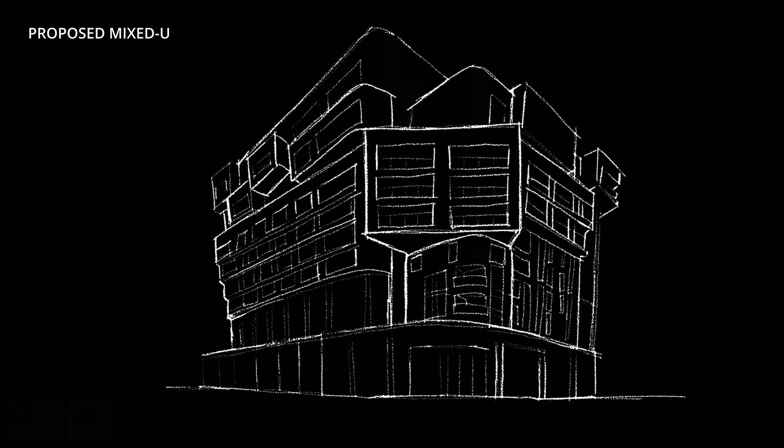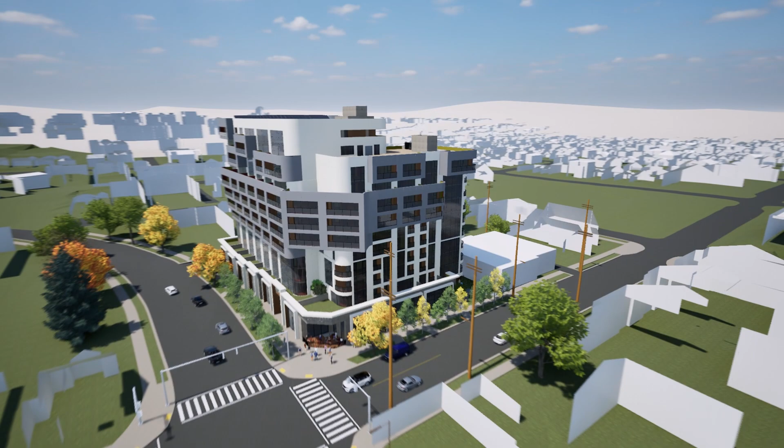Our project started on acknowledgement of the growing housing supply challenges within Calgary. Supported by the H.A.T members, it's focused on developing a residential building in inner city Calgary. We decided to build a 12-story multi-use residential building, and we set our target demographic to meet the needs of young families and economically independent retired couples.

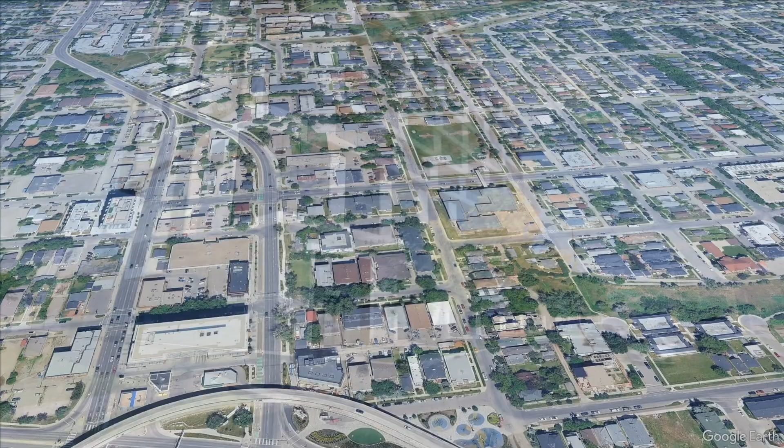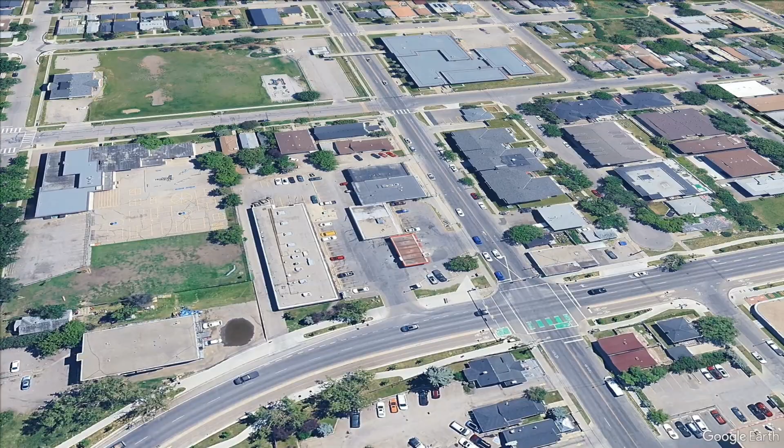The building's location at the intersection of First Avenue Northeast and Edmonton Trail within the vibrant Bridgeland-Riverside community is essential to our vision. Bridgeland is one of the fastest growing communities among inner city.

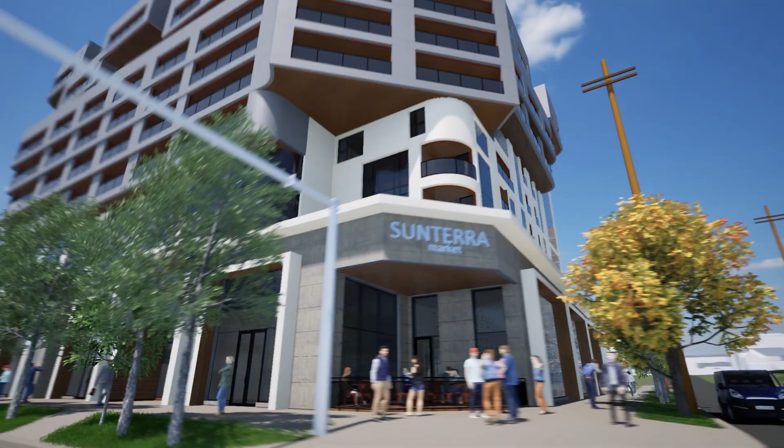I'd like to introduce our project building, where the interior and exterior spaces interact with the street and people, and where the building and people come together through the public space for the local community.

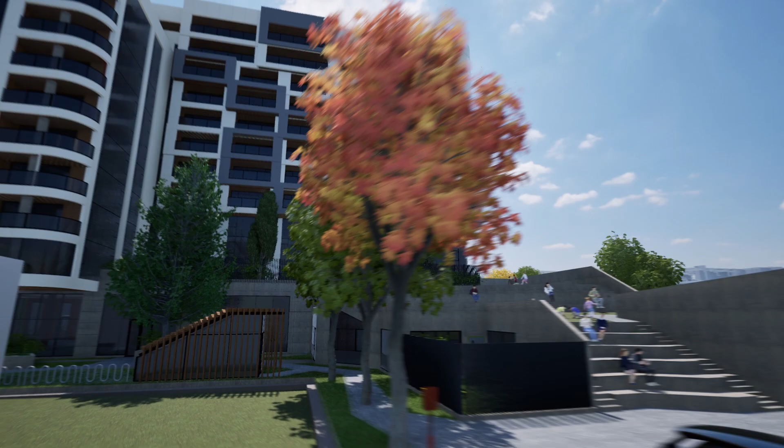Initially, our design concept derived from a comprehensive understanding of contextual site analysis, and we've developed a building facade and landscape design based on this conceptual foundation. We'll now elaborate on these more detailed situations, including the key detailed drawings.

We figured the initial step was to get grips with the site and its surroundings, so we could come up with a building design that would properly address our group's needs.

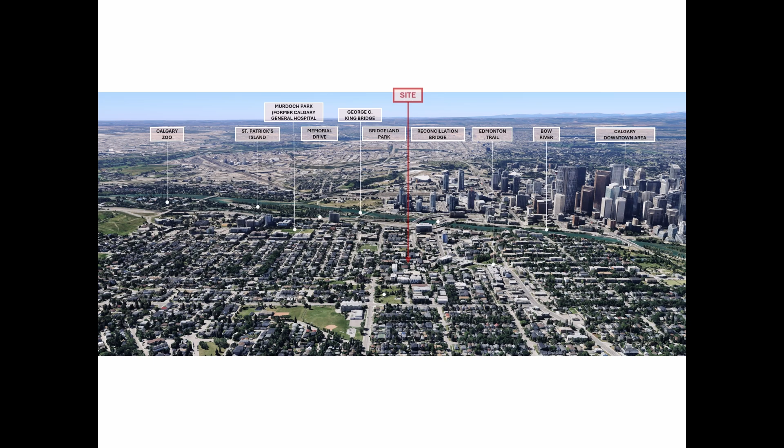We decided to build a mixed-use residential building based on the land use regulations, which is MU2, and the site area of 3,750 square meters. The site faces First Avenue Northeast on its south and Edmonton Trail on its west.

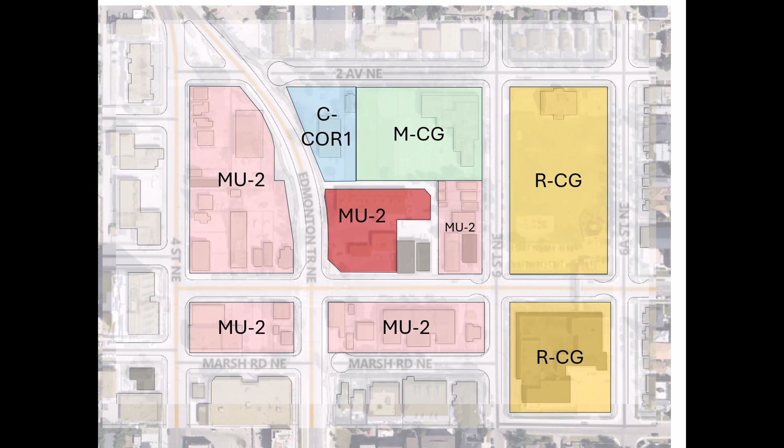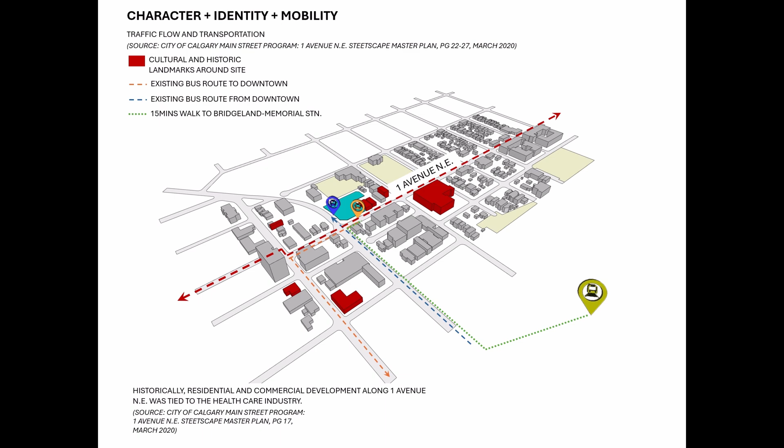Another consideration was that we have an existing historical building neighboring our site to the east. Furthermore, we investigated the City of Edmonton Trail Development Plan and First Avenue ARP, which lays out the intentions to turn the area into a pedestrian-friendly community and a main street. So we based our design around that.

We also considered the site's proximity to existing shops, public transport, and noise. We also found out that there aren't any daycare centers or grocery stores near the site, so we decided to include those into our project.

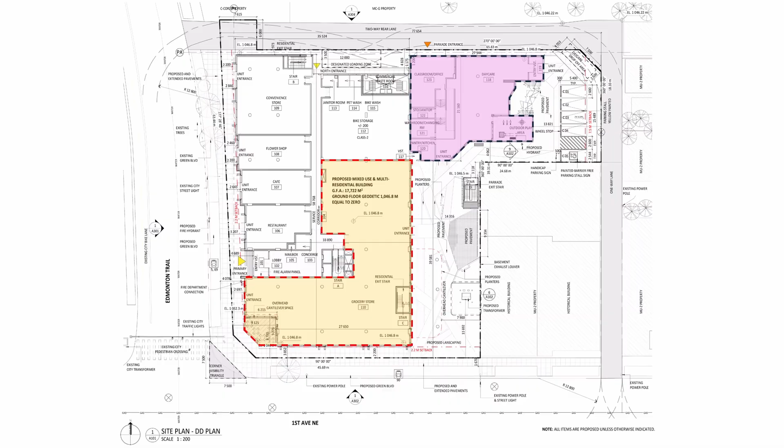We also made sure to create an open public space to incorporate the historical building and the community. In conjunction to this, we wanted to integrate everyone's design ideas into a single plan. Considering the shape of the site, we came up with an L-shaped form of the building.

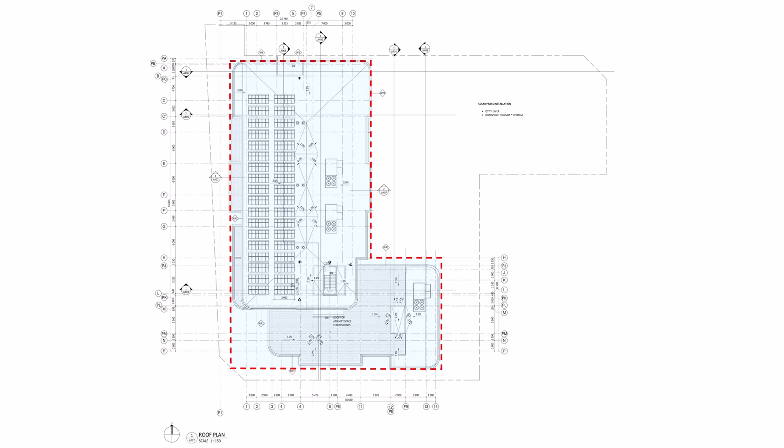With this orientation, we were able to take advantage of the downtown view. We also agreed that the massing concept was derived from a quadrate form, ultimately transforming it to an actual building facade through the push and pull scheme. This scheme will definitely create an eye-catching structure amongst the vicinity.

To achieve the push and pull scheme of the facade, we utilized the balconies to prevent thermal bridging. Exterior walls are built evenly so that the installation of the insulations is not complex.

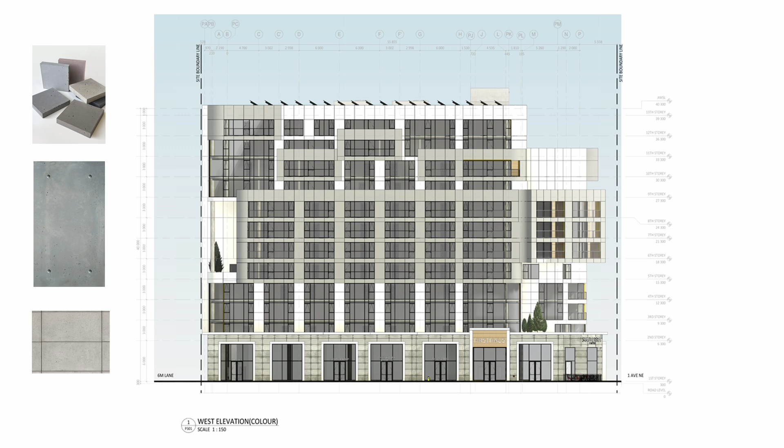The facade is composed of three main systems: GFRC, which is off-form concrete finish, used at the base facade of the building, adding more industrial look along the shop front of the commercial spaces.

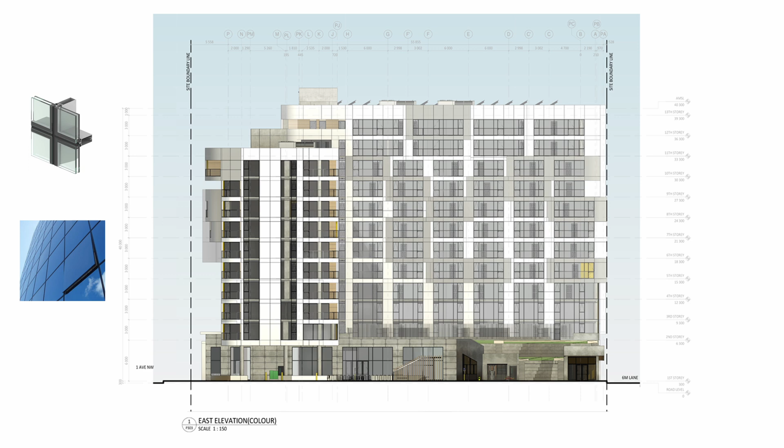Aluminum composite panels were used as the main material for the upper floors, since these materials are lightweight without compromising durability. A frameless curtain wall system was also integrated into the facade to achieve a seamless and unobstructed view. This also eliminates visible framing, providing a sleek and modern aesthetic design of our building.

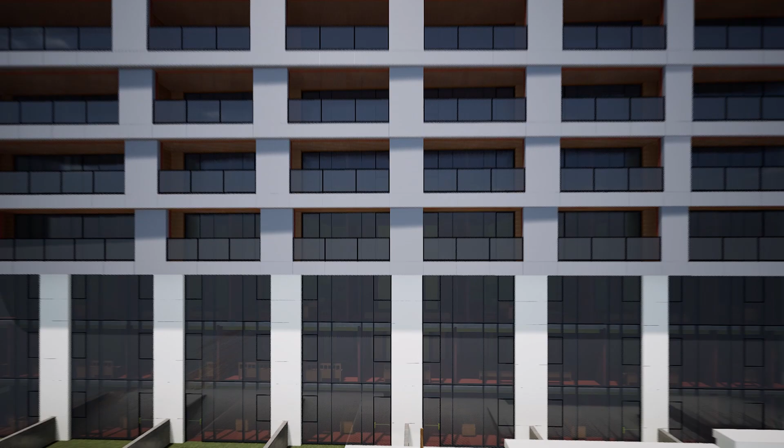Our rationale for selecting a frameless curtain wall system over a conventional one aimed to achieve a significantly cleaner and more monolithic exterior aesthetic. This approach allows for a smoother visual transition across the facade, and importantly, by eliminating the spandrel panel, it creates streamlined horizontal massing.

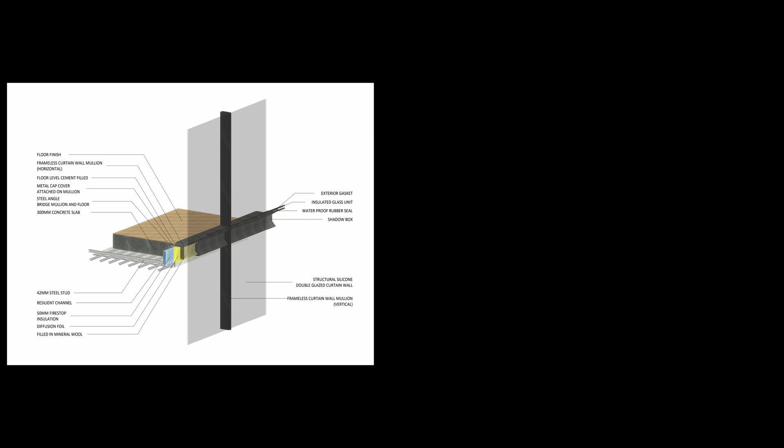To implement this effectively, we researched many frameless curtain wall mullion systems, modeled it, and applied it to the project. Compared to the existing frame mullion width of 63.5 mm, the visibility of the appearance could be reduced by about one-fifth. Assuming the same glass panel was used, heat loss such as thermal bridging could be maintained at almost the same level using insulated silicone.

In addition, we've incorporated a shadow box instead of the spandrel panel. This serves a dual function, providing an effective layer of insulation and simultaneously acting as a barrier to mitigate interlayer sound transmission.

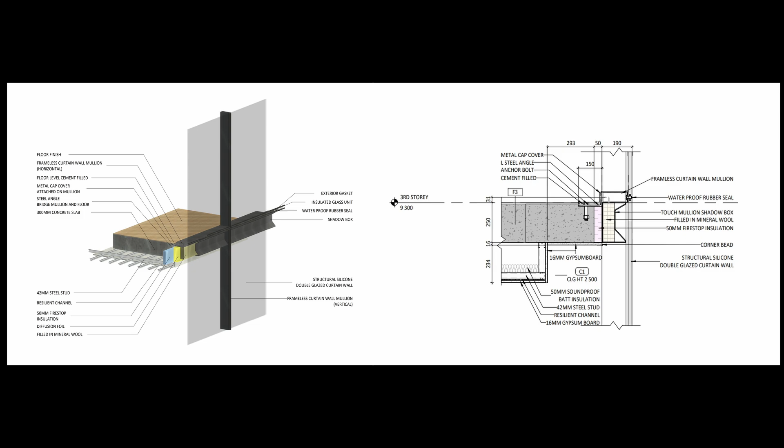The shadow box is strategically designed to create an air cavity beneath the mullion, which effectively blocks sound travel. It is hung vertically to the horizontal mullion so that it can be seen as minimal, both inside and outside the unit. One unique design feature of our project is the daycare roof garden.

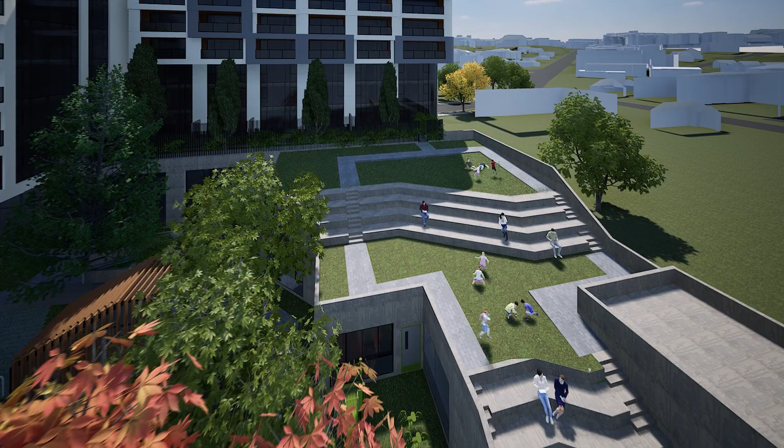Integrating this into our design is challenging since it requires proper planning and ensuring that waterproofing, irrigation, and drainage systems are systematically detailed out. Here is our detail for the roof garden.

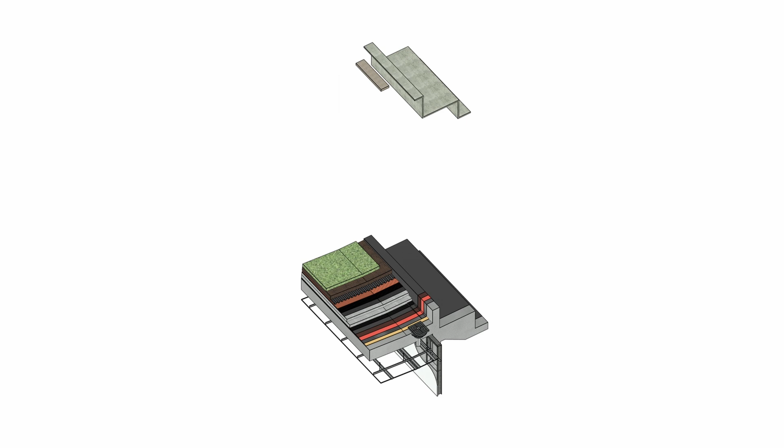Firstly, an EPDM membrane is installed with a drainage mat, followed by two layers of 75 mm rigid insulation and layers of moisture and air barrier. Then a water retention layer is placed, and an engineered soil with planting is installed to complete the detail.

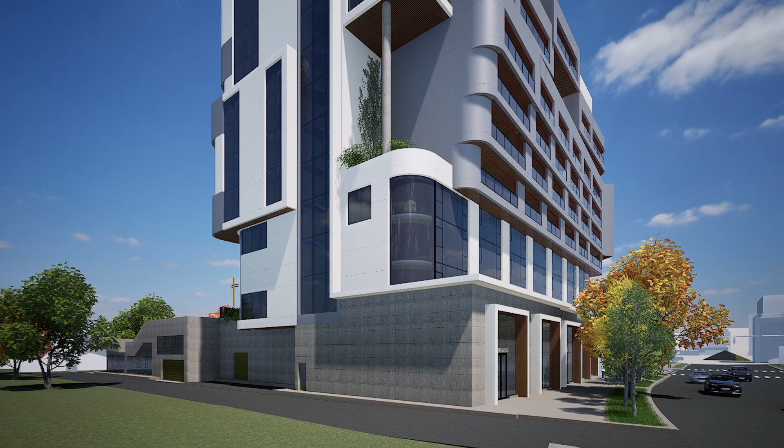One key feature present in our building is a green roof along the west and south side of the second floor, serving as a yard space for the units there. This detail focuses on how the green roof connects to the parapet and the curtain wall sill.

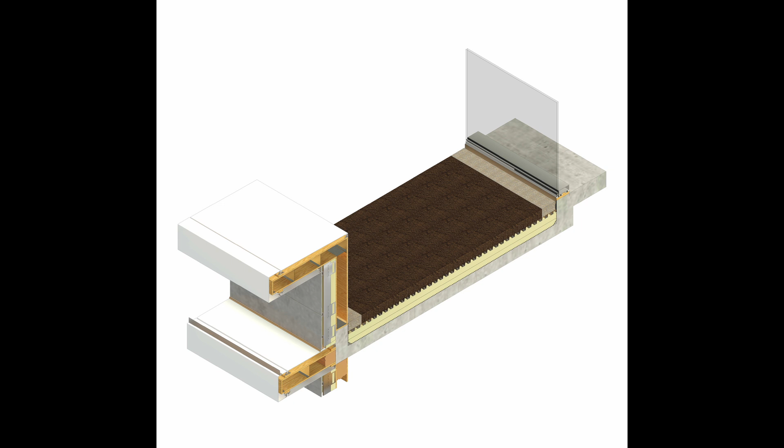We focused on ensuring proper drainage to prevent water damage, using layers like flashing, a drainage layer, and waterproofing membranes. Since this assembly sits above a heated commercial unit, it also includes 150 mm of insulation and spray foam insulation where needed. Included here also is a parapet detail on how it should be done in relation to our facade design.

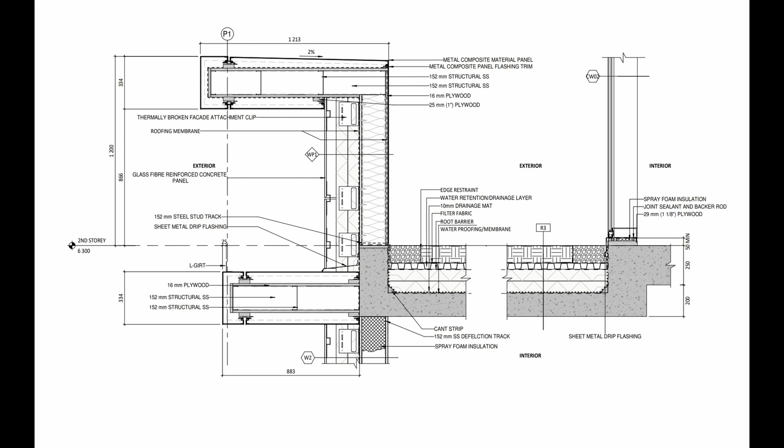We have 3 levels of underground parkade, providing parking allocations based on city bylaw. We've split up the commercial and residential spots with practicality and convenience in mind, keeping the residential parking separate on the lower levels. We've provided a total of 170 underground parking spaces, along with 5 surface spaces.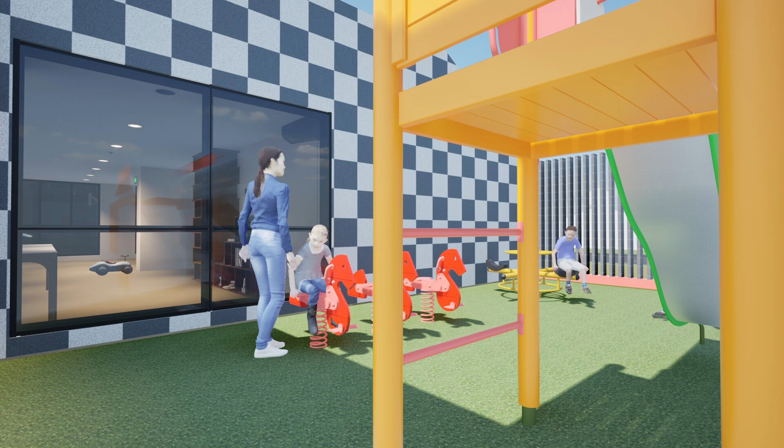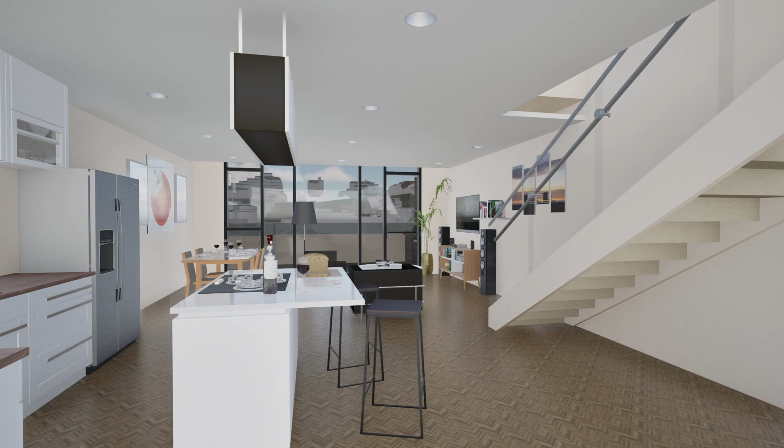The residential units are largely 1-bedroom and 2-bedroom units, with townhouses on the second and third floors on the west side of the building. Notably, units on the second floor may come with an individual front yard.

While 1-bedroom and 2-bedroom unit layouts are unitized within a larger frame, they've been adapted and tweaked to fit with the specific location and structural requirements.

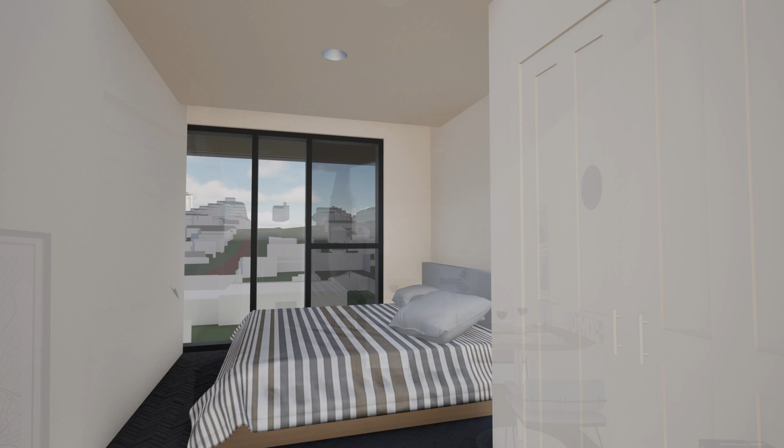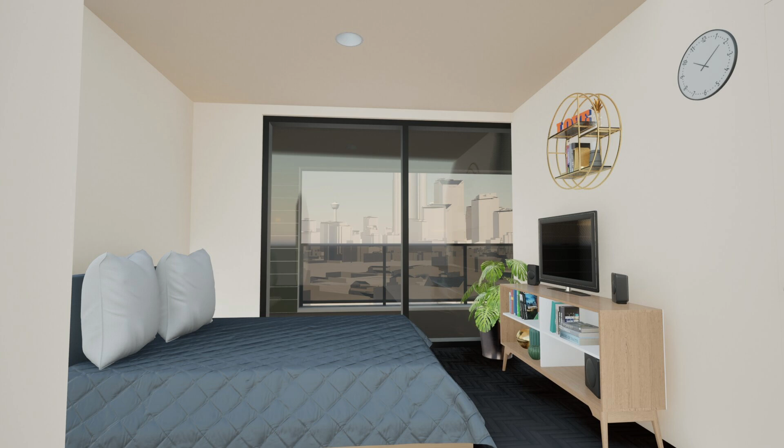The building has been carefully considered to do away with any cramped feeling, even in the 1-bedroom units, aiming to step up the flow and quality of life through enhanced efficiency and convenience. As the building goes up, more spacious and larger units are located.

From scratch, we aimed to achieve a high level of drawing set of construction documents. Consequently, we tried to include as many drawings as possible, culminating in a final submission of more than 100 pages.